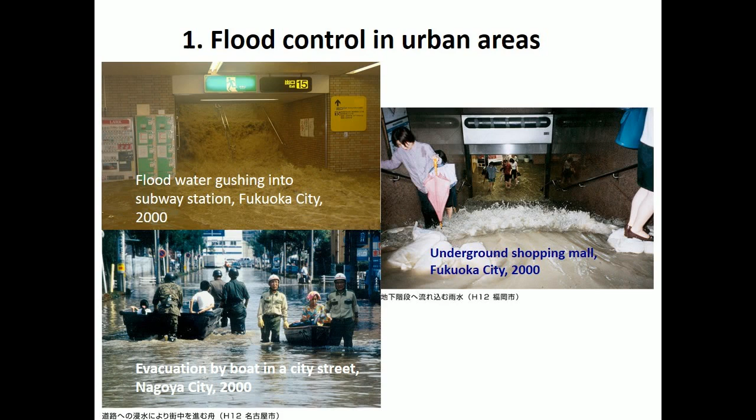Comprehensive measures are being pursued to ease the situation. These measures are a combination of structural, non-structural, and self-help measures. Structural measures include the improvement of storm sewers and the construction of storage and infiltration facilities.

Non-structural measures include real-time flood forecasts and flood maps for citizens. These measures work well with self-help measures and include voluntary evacuation and sandbagging by citizens around private properties.

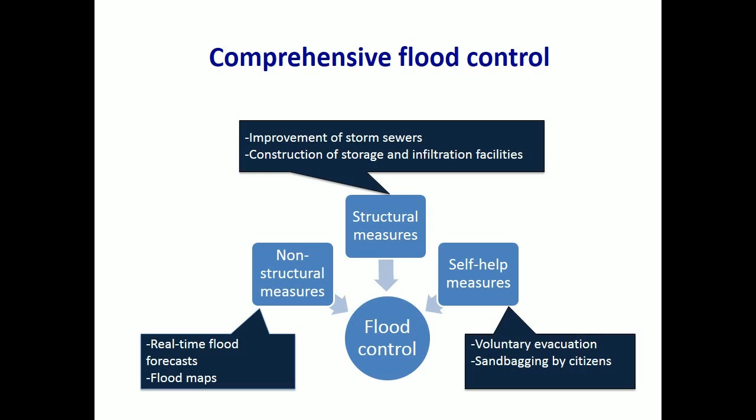The second challenge is the need to increase earthquake resilience, because Japan is prone to strong earthquakes. Once wastewater systems are damaged, the impact can be severe. For example, a damaged sewer system can cause a spillage of wastewater that runs into residential areas and public water bodies. This would pose a serious threat to public health and sanitation.

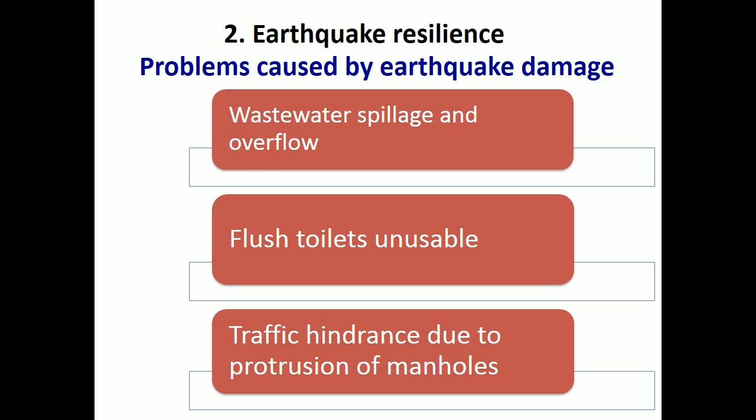In addition, broken sewer lines make flush toilets unusable, which has a severe impact on the health of survivors. Liquefaction is a common phenomenon after an earthquake. This results in manholes protruding through road surfaces, which results in severe disruption to traffic. As a result, emergency vehicles are affected immediately after an earthquake.

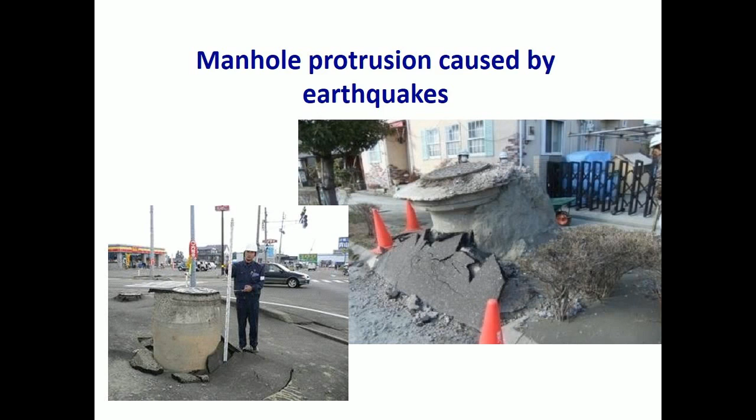For these reasons, wastewater systems need to be earthquake-proof. Central government is implementing 2 measures to achieve this. First, it is providing subsidies to wastewater utilities to fund earthquake-proofing work. Second, it is suggesting that each utility formulate a Business Continuity Plan (BCP). A BCP is designed to ensure quick restoration of essential functions of wastewater services.

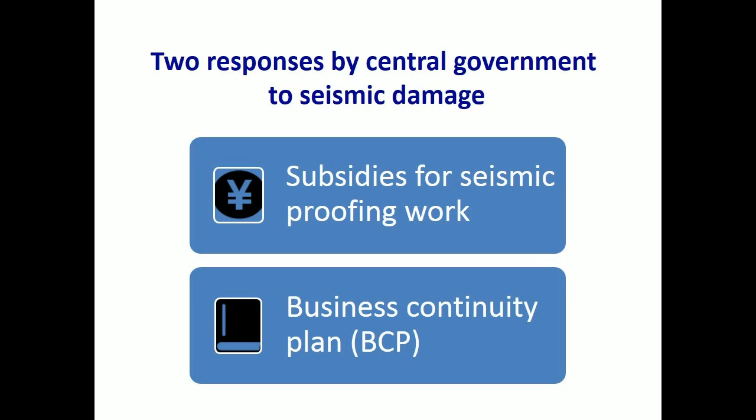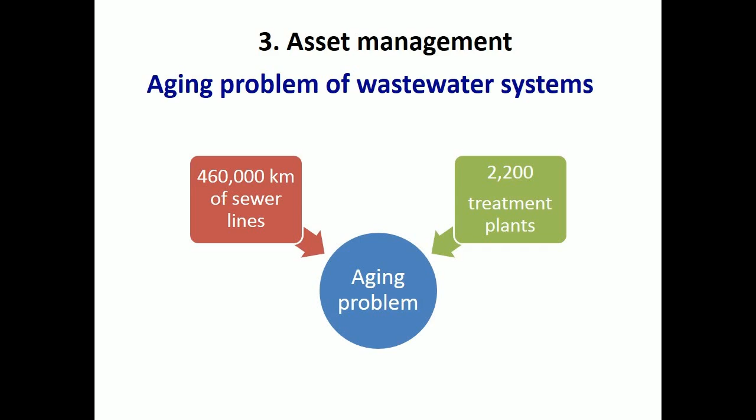The third challenge is the implementation of asset management. A total of 460,000 kilometers of sewer lines and 2,200 treatment plants have been built. This massive amount of assets continues to age. The failure of aged facilities will pose a serious problem soon, if left unaddressed. It is reported that around 4,000 sinkholes are caused by failed sewers every year. These photographs show examples in downtown Tokyo.

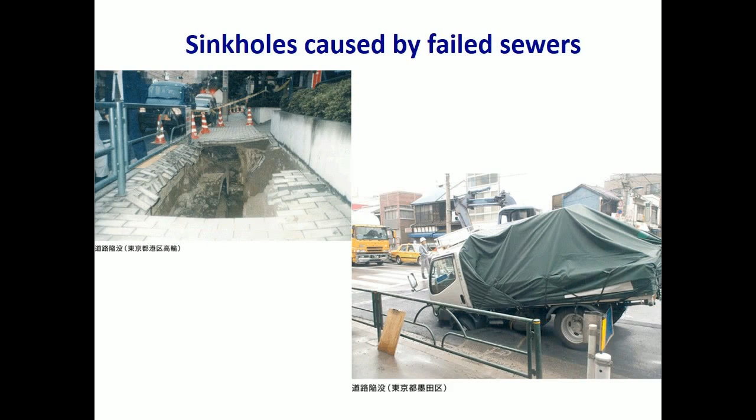To remedy this situation, the following 3 points are emphasized. The first is preventive maintenance. The second is a condition assessment. The third is renovation based on long-term planning. In relation to preventive maintenance, in 2015, the sewerage law was amended to ensure proper sewer management.

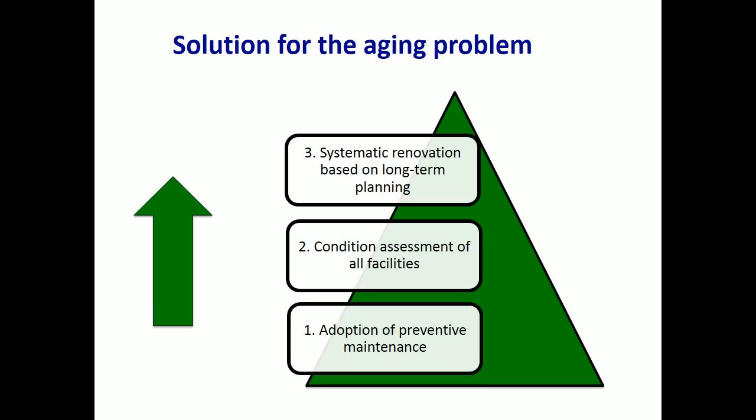The fourth challenge is eutrophication in stagnant coastal and freshwater bodies. The water quality in public waters has steadily improved in rivers and running water. But there remains the problem of eutrophication in stagnant water. Pollution has been observed in bays of Tokyo, Nagoya, and Osaka. Lake Biwa and Lake Kasumigaura, Japan's 2 biggest freshwater lakes, are also eutrophicated.

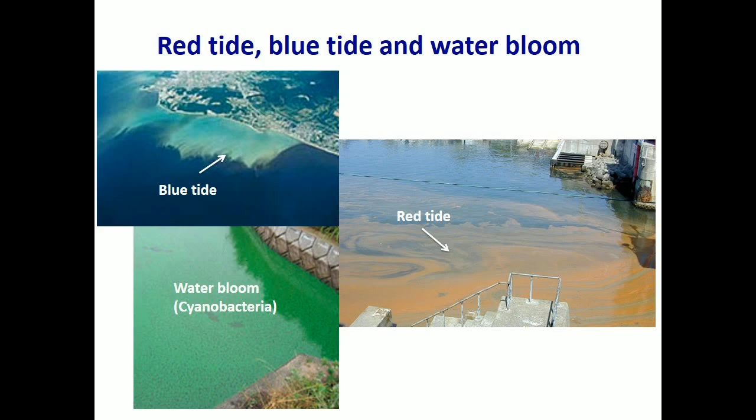These pictures show the consequences of eutrophication: red tides, blue tides, and water bloom. These phenomena severely impact fisheries, ecosystems, and scenic beauty. To help counter eutrophication, nutrient removal is necessary at treatment plants. But the implementation is slow, particularly in the watershed of Tokyo Bay.

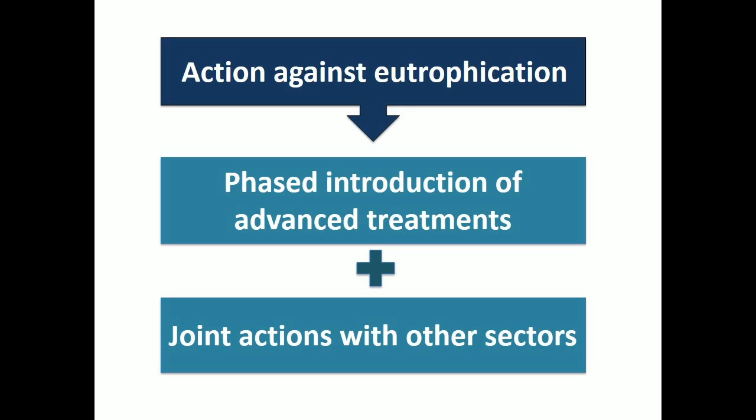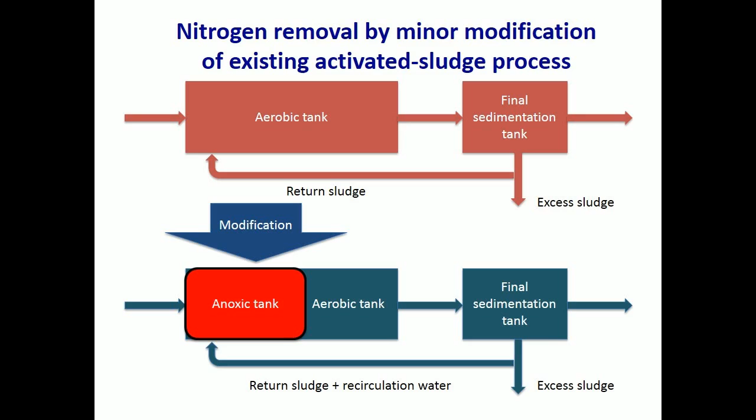The second solution is cooperation with related government offices. Alleviating eutrophication needs to involve not only wastewater operators, but the authorities of other dischargers at point and non-point sources. In particular, for the control of non-point sources, the involvement of government agriculture and forestry offices is essential.

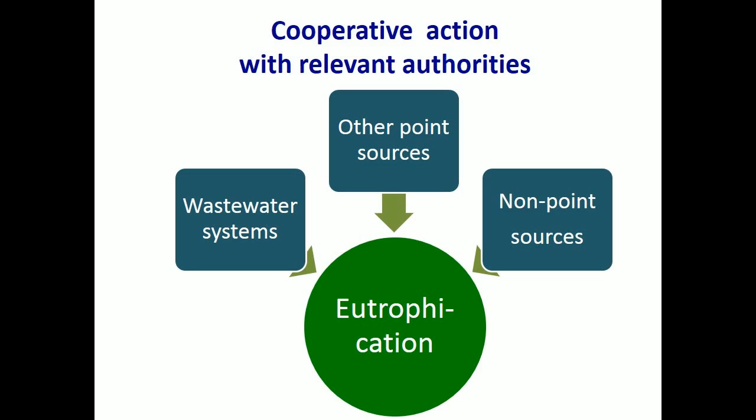The fifth challenge is restoring waterfronts. Over the decades, waterfronts in urban areas have diminished. The main reason for this is the loss or reduction of running water due to urbanization. Decreasing pervious areas, conversion of urban streams into culverts, and climate change in recent years are responsible for this.

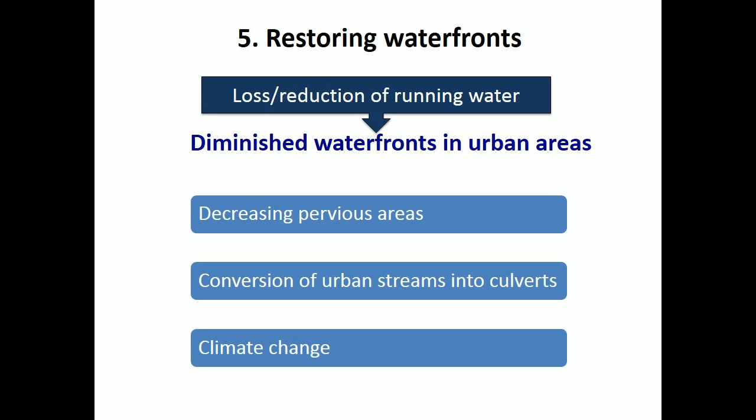To revive waterfronts, 3 solutions are implemented to increase the flow of streams. First, the reuse of treated wastewater. Second, rainwater utilization after storage, and infiltration. Third, revival and creation of waterfronts with civic participation. Partnerships with citizens from planning to operation and maintenance produce good results.

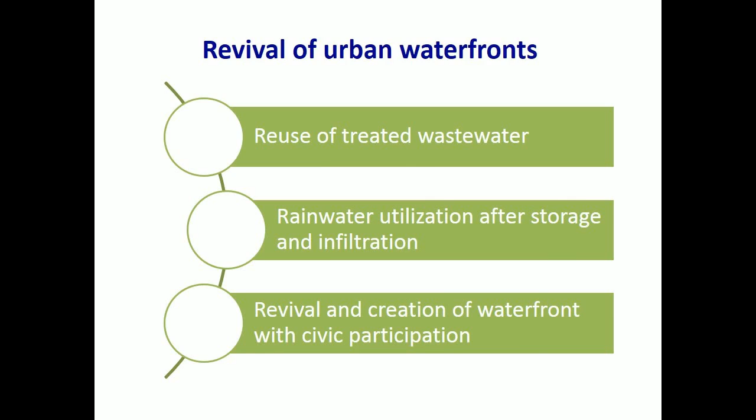The sixth challenge is the improvement of combined sewer systems. A CSS is designed to convey sanitary wastewater and storm water in the same pipeline. This results in an overflow of untreated wastewater when a system receives heavy rainfall. CSSs have been used as a low-cost solution in urban areas, and serve approximately 25% of the population. But CSSs need improvement for the protection of public health and for a clean water environment.

In 2001, fat, oil and grease balls (FOG balls) drifted ashore at Odaiba Marine Park, attracting public attention. As the park is a very popular leisure spot in Tokyo, it was revealed by the media that the FOG balls came from a CSS, which resulted in a major social controversy. Since then, serious efforts have been made to improve CSSs all over the country.

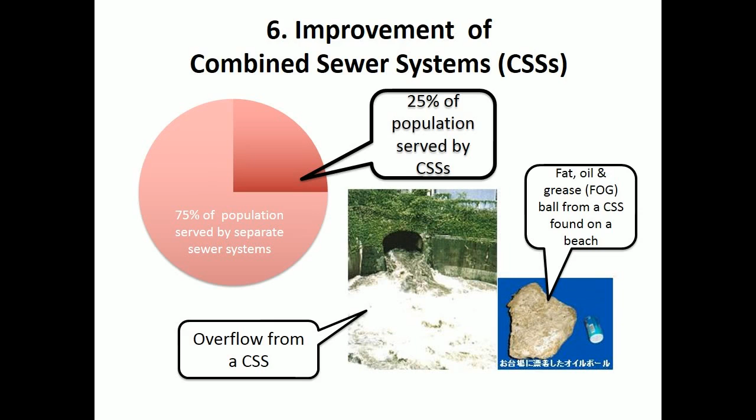The improvement of CSSs has 3 policy goals. First, reduction of pollutant load. The total pollutant load from a combined sewer system shall be equal to or less than a separate sewer system for the same sewer district. Second, public health protection. The number of overflow events of untreated wastewater shall be cut by half. Third, elimination of gross solid discharge. Gross solids shall not be released into public waters from CSSs.

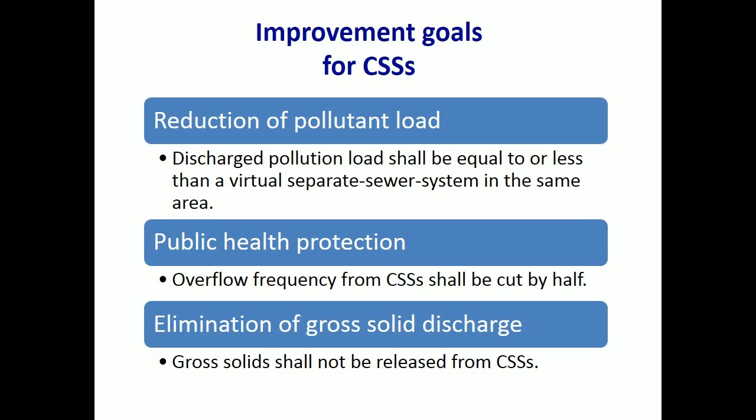In 2003, the sewerage law was amended to make policy goals mandatory by specified deadlines. The deadline for small and mid-sized municipalities was set as 2013, and for large municipalities it was set as 2023. To date, 169 out of 170 small and mid-sized municipalities have completed their requirements. 2 out of 21 large municipalities have also completed improvements.

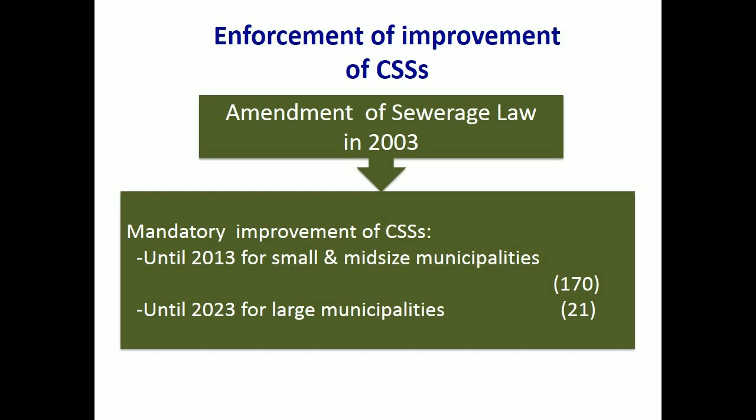The 7th challenge is an expansion of service. Currently, there are still around 14 million people waiting for access to wastewater treatment services. In these areas, untreated grey water is discharged directly into the environment. It is an urgent task to deliver wastewater services to these areas.

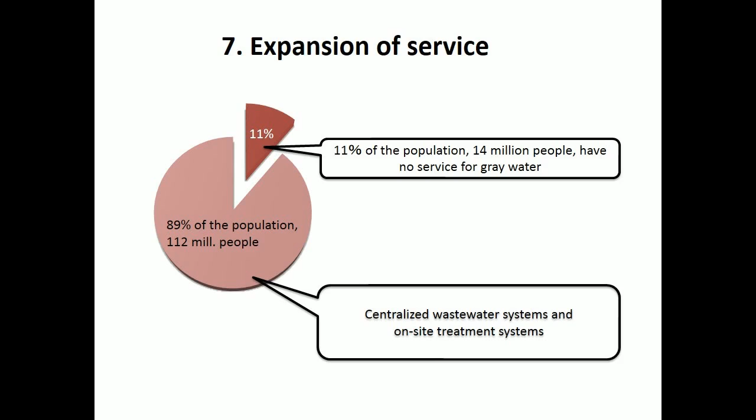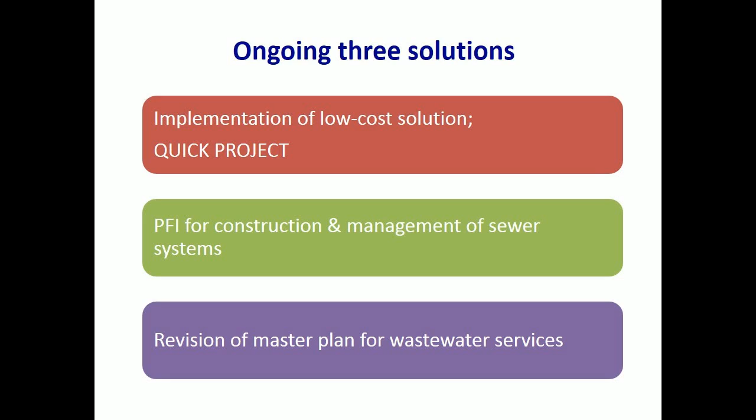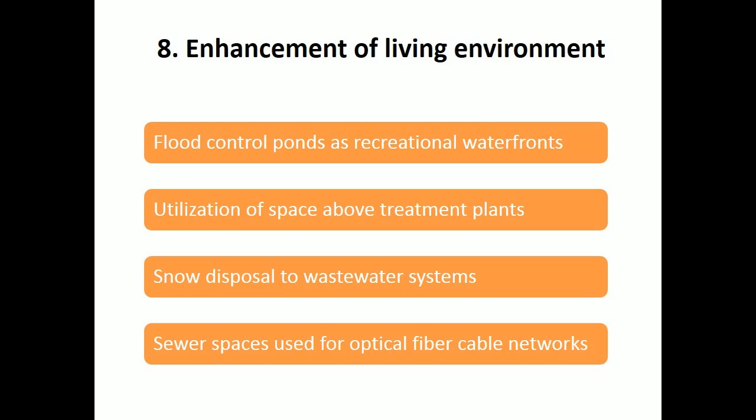The 8th challenge is the enhancement of the living environment using wastewater assets. Examples include use of flood control ponds as recreational waterfronts, utilization of the space above treatment plants as playgrounds, use of wastewater facilities for disposal of collected snow, and installation of optical fiber cables in sewer lines. The photographs show a playground constructed on a treatment facility in Tokyo. In total, 369 treatment plants have opened the spaces above them for public use in Japan.

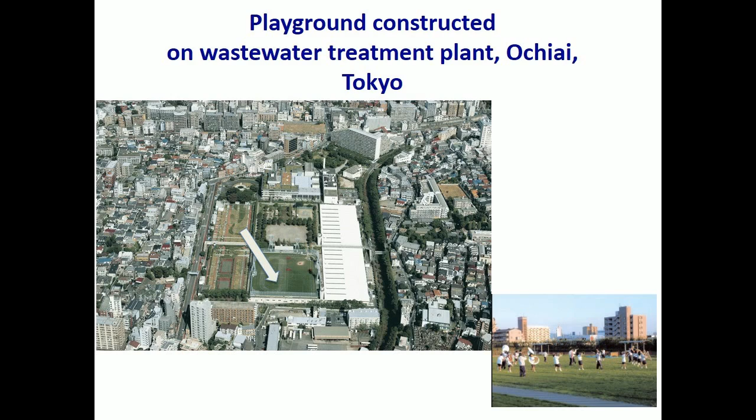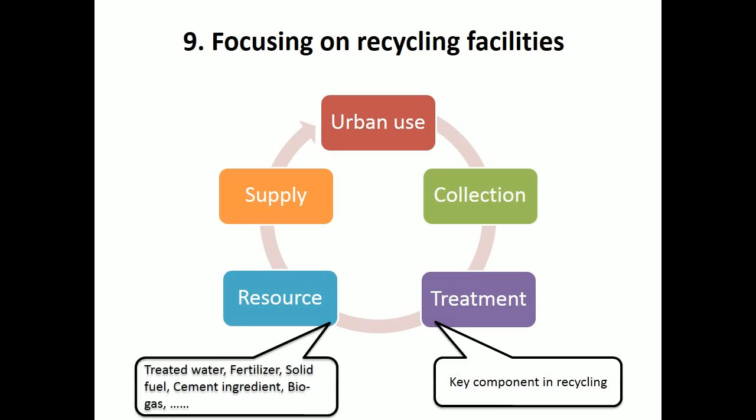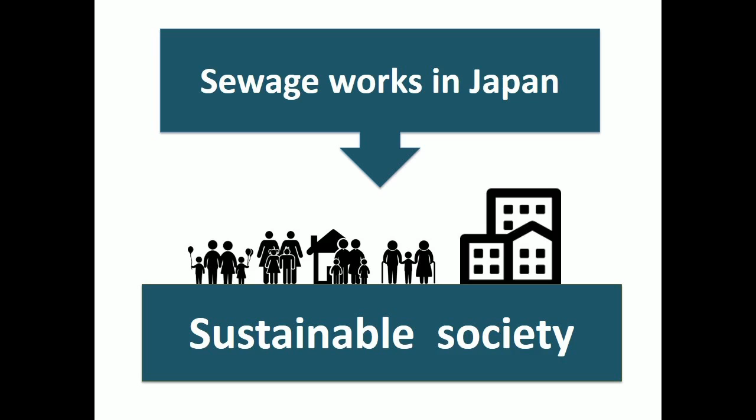Sewage works in Japan are striving to deliver the best service possible to customers while facing these 9 challenges. We will continue to work for a sustainable society through wastewater service.